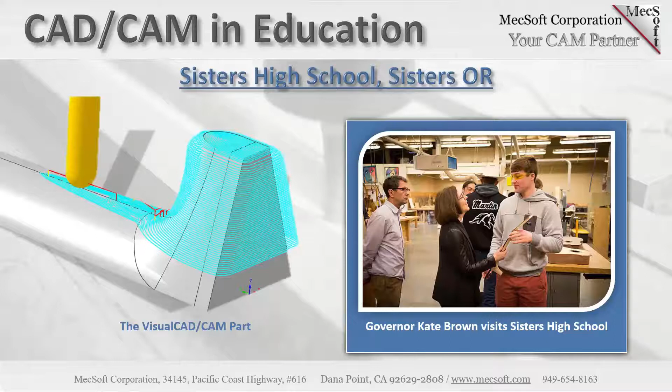Where is Sisters High School and what do they do? Sisters High School is located in Sisters, Oregon, and it takes its name from the nearby Three Sisters Mountains. Tony Cosby is the technology instructor there, and he teaches beginning and advanced woodworking, construction, and introduction to engineering and design through a program called Project Lead the Way. That's a curriculum written by actual engineers for high school students.

So what do the students do? They manufacture ukulele and luthier guitars, from start to finish, in what I believe is a 2-year program. At the end of it, they'll have a completed guitar. Since introducing the luthier program in 2005, each class has averaged 30 instruments a year. At the end of the year, students can keep their instrument or sell it at a fundraising auction for the school.

The program also has Tony assisted by Jason Bowerman of Breedlove Guitars, along with a team of 12 dedicated on-site volunteers. You can just imagine the size of this program - Tony and 12 other people helping students build guitars. It's pretty awesome. Let's go to the next slide.

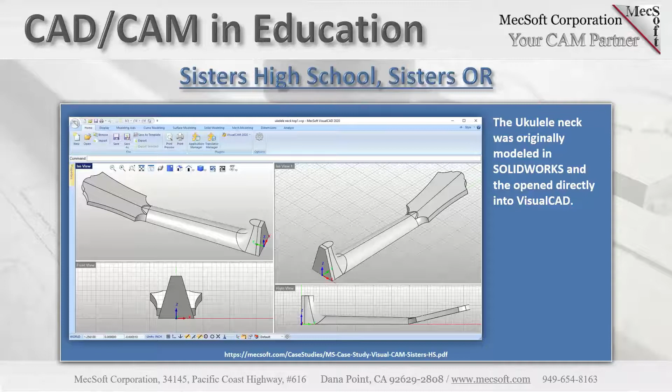Now, this is the part we're going to look at. What you're seeing here is VisualCADCAM - we're looking at the CAD part, VisualCAD. Sisters High School actually has multiple seats - they have VisualCADCAM, and they also have VisualCAM for SolidWorks. So this part came out of SolidWorks and loaded up into VisualCAD, and as you can see, it's a 3-dimensional neck of a ukulele guitar.

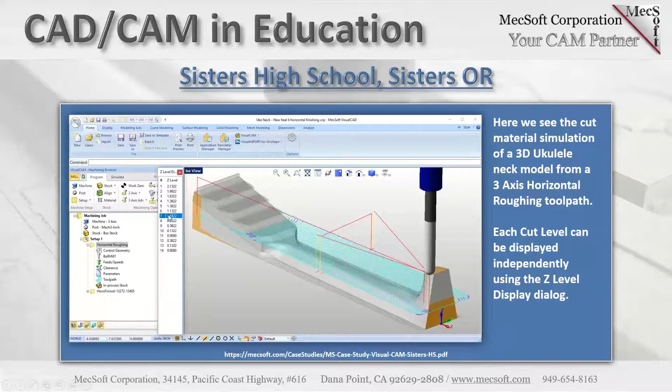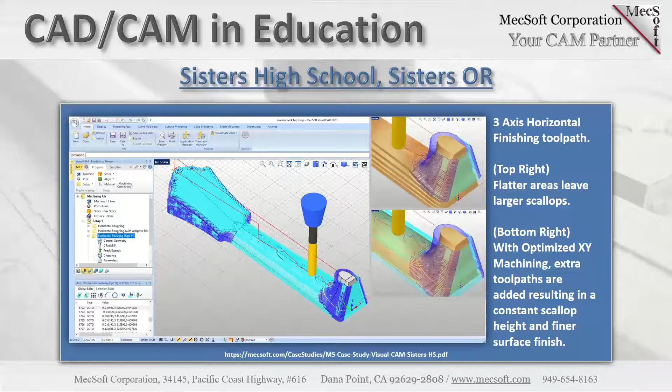When we talk to every user, our main question is why. Why are you using our product? Why aren't you using a competitor's product? Why are you still with us? We get a lot of different answers, but they tend to boil down into two main areas.

For Tony, I'm going to paraphrase him here, and you can read it in the background. Primarily, it's ease of use for Tony. He's working with high school students—young students, sharp minds, but they've never been introduced to anything close to CAD or CAM.

Tony has talked with other instructors in nearby schools, some who use MasterCAM, and the kids there are struggling greatly. If you can imagine a high school student trying to understand MasterCAM in order to get his ukulele guitar neck machined, it's a big struggle, and they get bogged down with it. As Tony says, it takes a lot of time to learn new software, and when he finds something that both works and is easy to use, he stays with it—that's his main reason.

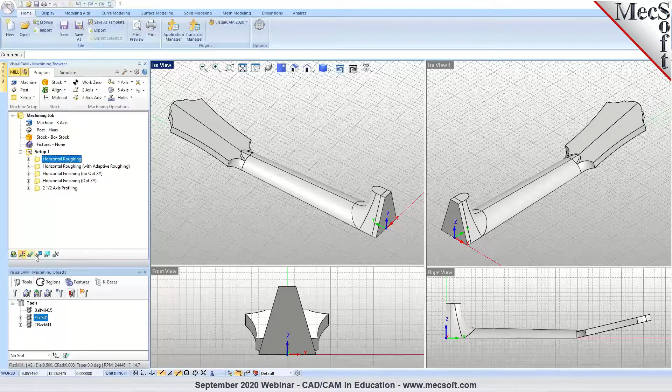So let's go through the toolpaths initially. Let's turn the toolpaths on. We have a Z-level roughing operation, and you can look at that in levels, going down and examining each level in the cut material simulation or toolpath simulation.

So there is the initial horizontal roughing, done initially without adaptive roughing enabled. Adaptive roughing is a new enhancement we added recently, which allows you to combine re-roughing and a roughing operation in one pass. It goes back and analyzes the step downs and lets you specify an additional step down distance to take more material away from the part, all in the same operation. We'll show you that in just a second.

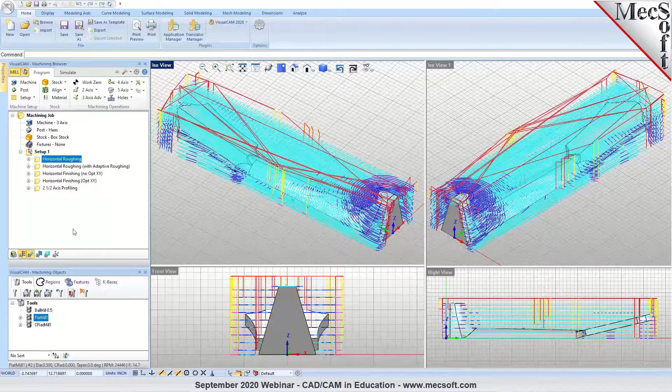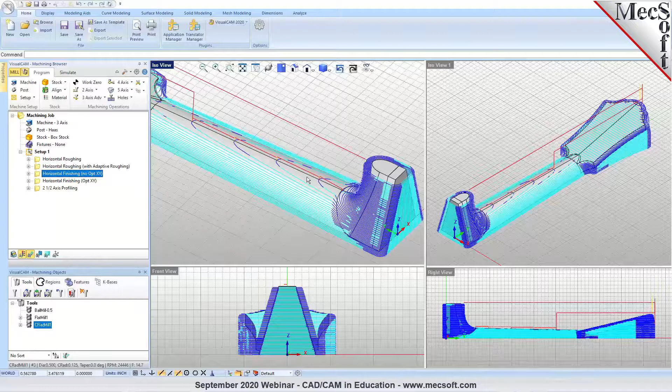Here is the initial Z-level finishing operation without optimized XY machining enabled. As the XY Z-level planes are sliced to calculate the toolpath, in areas that are near flat or barely radiused on the neck, you see widening between the toolpaths. That leaves cusping along the neck and along here, which you'd normally have to clean up with another operation.

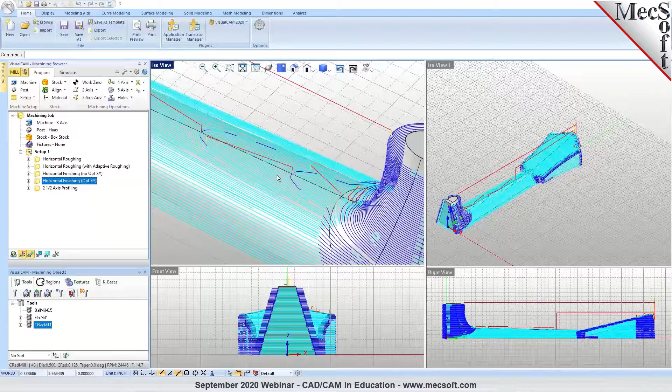However, the same operation with optimized XY machining enabled—just a checkbox you turn on, plus a step over distance—calculates additional toolpaths to clear all of this material out and get a nice finish in one toolpath operation. Then we have a cleanup profiling operation to clean up the sides.

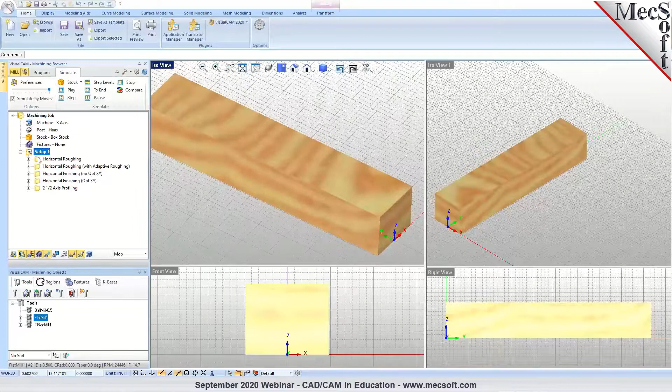So let's look at the cut material simulation. Here is our box stock for the neck. Let's zoom in a little bit. And here is our initial Z-level roughing. Let's turn the toolpath off. You see a lot of stair stepping going on here.

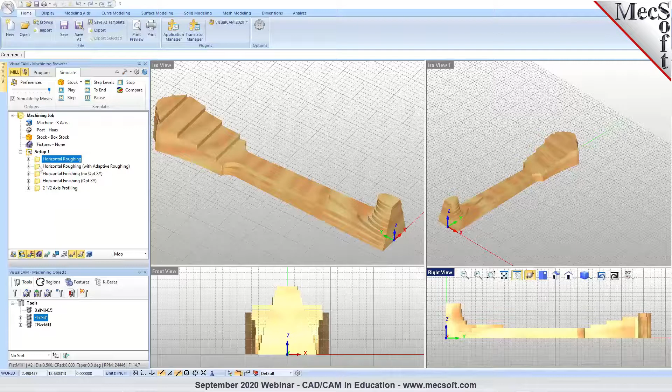You can see it in this view over here—a lot of stair stepping, a lot of material left that you may want to remove with another operation. Well, there's no need to do that. We just turn on adaptive roughing, illustrated by this next operation—same operation, just copied down with adaptive roughing enabled. You see it cleared out a lot more material along here, along the neck area, and along here as well. So that's all in one operation.

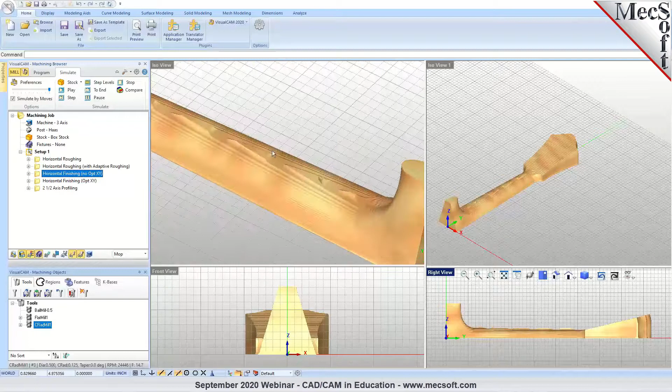Now here in the Z-level finishing, this is without optimized XY machining enabled. You see the cusping areas around the near horizontal areas leave a lot of material. Even with a really tight step down in the Z level, it still leaves material because of the large distance between toolpaths in near-horizontal areas, and you can see it up here as well.

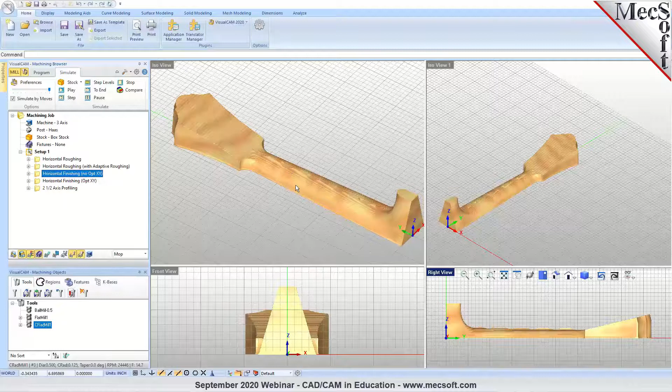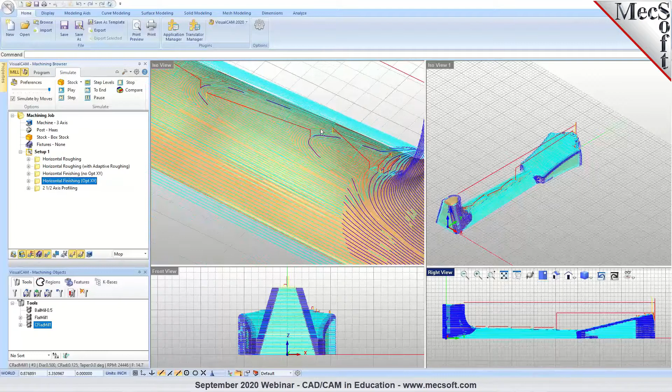So how does it look with optimized XY machining enabled? Again, it's just a checkbox, the same operation. You turn the checkbox on, give it a step over distance, and this is what you come up with—all of that material is removed. So you have your initial Z-level finishing, and then it goes in and adds additional toolpaths in these areas. Here is the main cut level, and then it added all of these extra paths to clean that material up. So you can do that all in one operation.

Okay, that's the Sisters High School ukulele neck. Let's take a look at RhinoCAM from IYRS. Just one second.

There was a question on where do you turn on the optimized XY machining. I actually posted a link to the blog article on that. But if you can quickly show it—yeah, let's go back to the Sisters High School one, and I'll show it to you there.

So this is the ukulele neck, and let's go into the first horizontal finishing or Z-level finishing operation without optimized XY machining enabled. And this one has it enabled. So let's go into the toolpath dialog here.

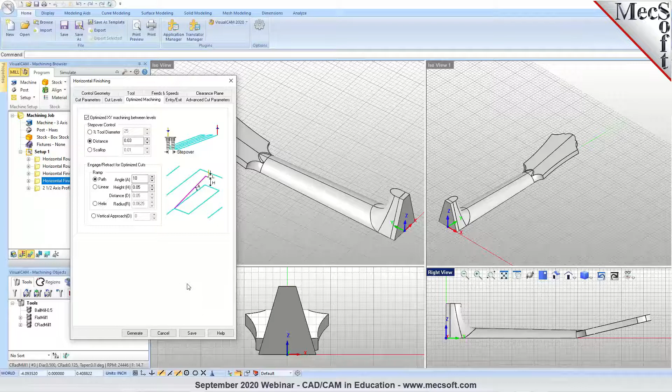For horizontal finishing, here are all your control parameter tabs. There's a tab called Optimized Machining—you select that tab, and there's a checkbox right here to turn it on and off. Initially you just turn it on, and you can provide additional parameters to control the step over that it's going to add in those areas. Here it's 0.03, or 30 thousandths step over, and you can also control the entry and exit in the additional step over areas. So that's where it's enabled in the horizontal finishing dialog.

Okay, hope I answered that. If not, we can get some more. As Joe mentioned, he put a link in the chat session to our blog post that talks about that specifically.